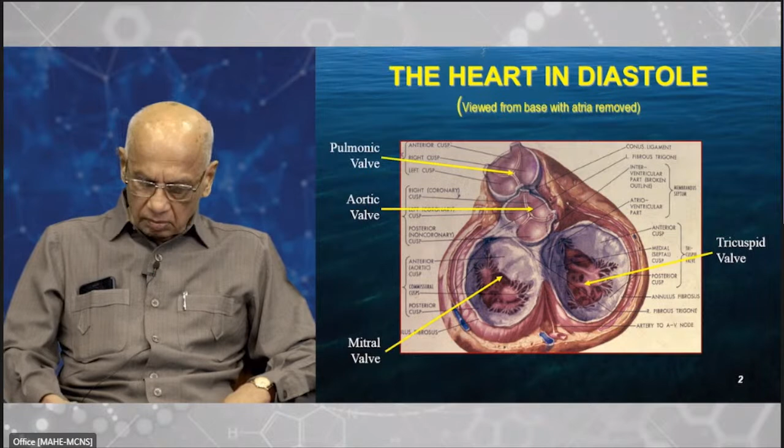So when we see patients with very severe symptoms, either these valves are not closing properly, so that there are leaks, or they are not opening properly, so that the output is blocked. That is where the problem comes.

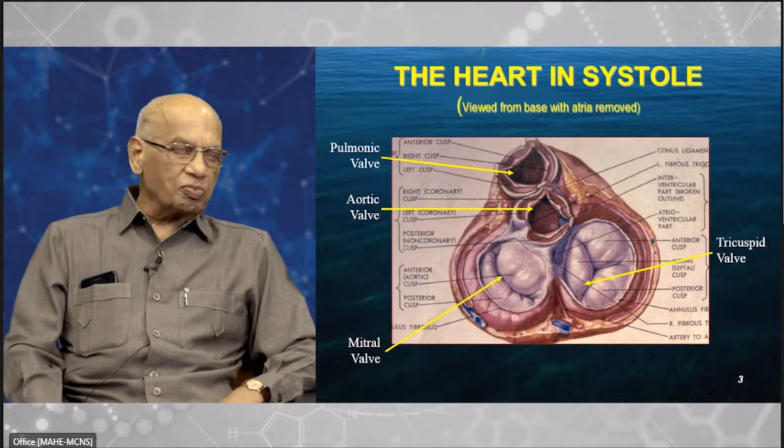Now, my problem was when I reached Trivandrum in 1974 in a new institute. We had plenty of patients with valvular heart disease. These are relatively young, in their late 20s or 30s, unlike in Western countries, where the average age is around 50. So we have young patients here, and a large number of women. This rheumatic heart disease is more common in women.

So when we started doing open heart surgery, I was trained to be a cardiac surgeon, so I knew how to do it. We had plenty of patients, but the problem was the valves. Valves had to be imported, very high cost, 8,000 rupees in those days, and our patients were poor patients. It's a government institute. The government wanted all this done free for them.

So we had very quickly a problem of a waiting list of patients. 100 patients, 200 patients in a matter of 2 years. Now it's impossible when you see these patients who are sick, they cannot breathe, and you tell them come after 2 years, your turn will come. It's the most heartless thing to do. We couldn't do that. So that is when we decided.

It was like I was trained to drive. I had a driving license. But I come here and I'm told you build the car. It is almost like that.

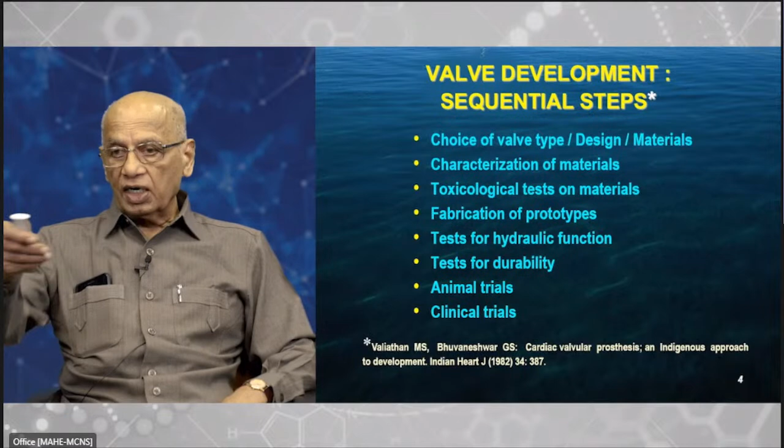Does it function the same way? That has to be checked. So we have to ensure that the rate can be increased. Flow can be, suppose, 1/3 ejection and 2/3 relaxation. Now can you change that a little bit and see whether the valve continues to function? All these kinds of testing we can do in the pulse duplicator. Now that is a very crucial test.

And then the next test is durability. As I mentioned earlier, the international standards which we follow, ISO, there is a particular number. All valve developers have to follow this. Otherwise, it's not acceptable. And that insists that it should have a durability of 10 years without any mechanical failure. Now that, as I said, is 367 million cycles of testing.

And obviously you cannot do the test for 10 years. So we have to do acceleration. The 10 years are compressed into 1 year. So 70 per minute, we accelerate to 700 per minute. That is how it is done. So an accelerated tester we have to develop; it is not commercially available. So again, if there is a problem in the wear testing and that model fails, then we have to start again.

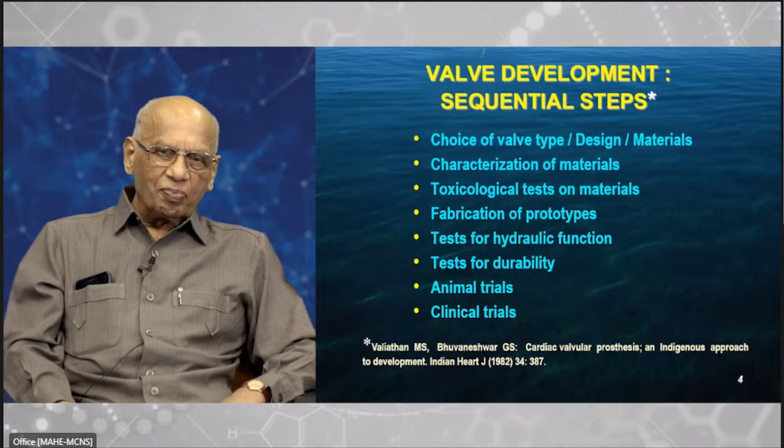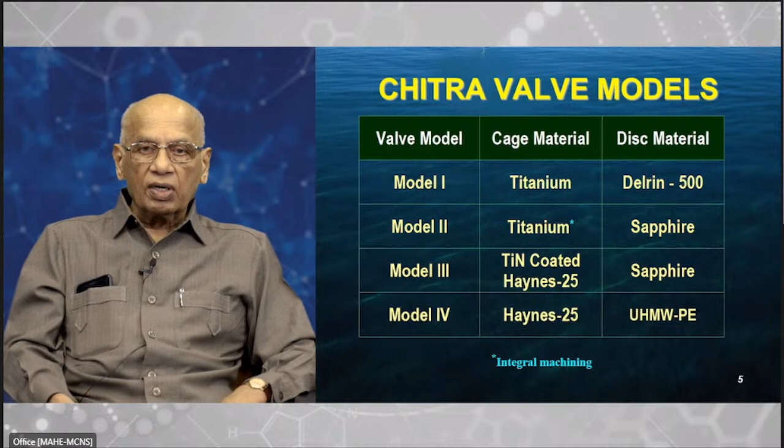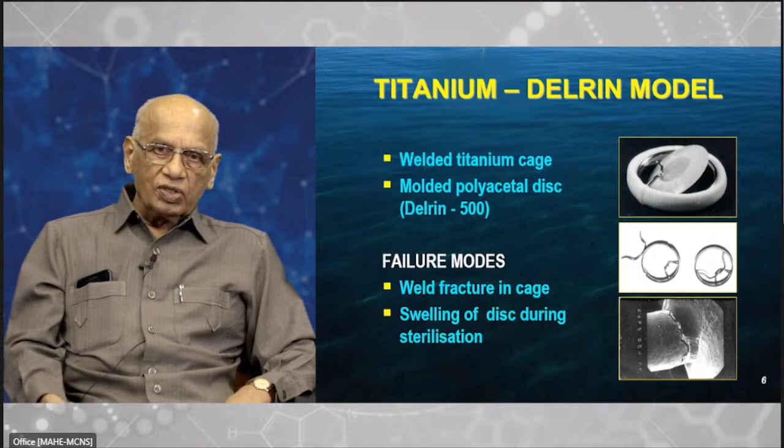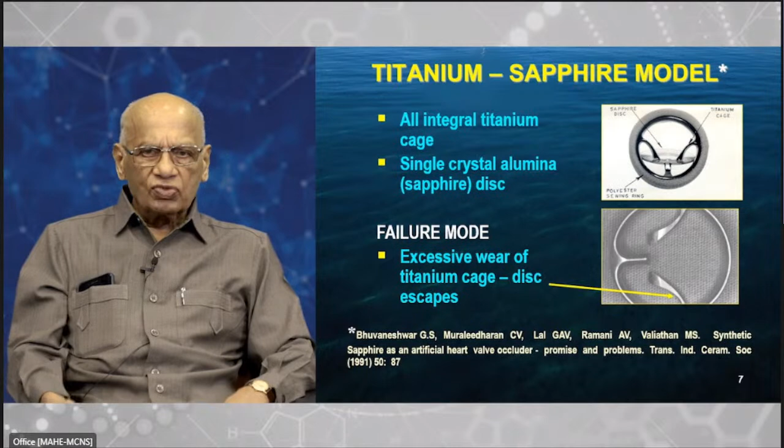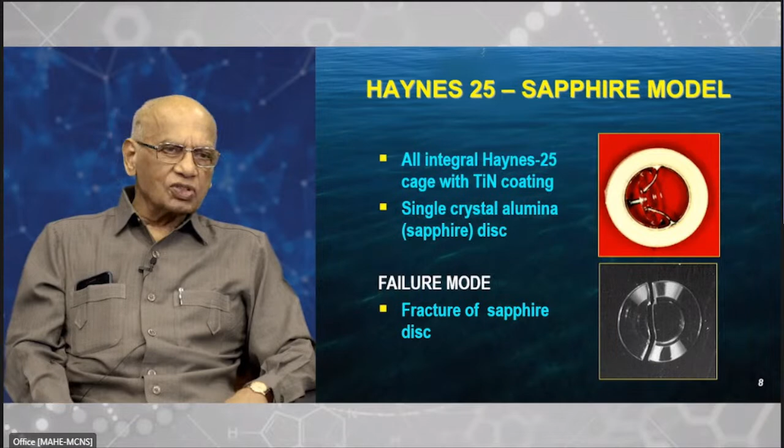Now this failed because the sapphire cracked. You can see that. You can see the sapphire is cracked. So the cage is all right here, but sapphire has cracked. So this also was a failure. Then we moved to the next.

That is the current model, the 4th model. Now here the sewing ring remains the same. It's a polyester cloth, warp knitted. There is no change in that. And we have the HAYNES 25 alloy for the housing cage of the valve with no titanium nitride coating. There was no need for it.

And the disc is ultra-high molecular weight polyethylene. Now this has not been used in cardiovascular applications, but there is a report of it being used in orthopedics, that we knew. And developing this, each setback is something like 2 years. We had already spent almost 6 years when that sapphire disc cracked, 1988. We had already been spending almost 7 years, I think, by that time.

Many people were simply tired. They wanted to give up. Many others were severely critical, wasting money and effort. Indians cannot develop heart valves, that kind of attitude. So we had to work very hard, very fast. That led to some of this testing, for example. We had to make a valve prototype and then do the testing for wear, for example. But we learned the time was very short for us, so we could do sub-assembly testing.

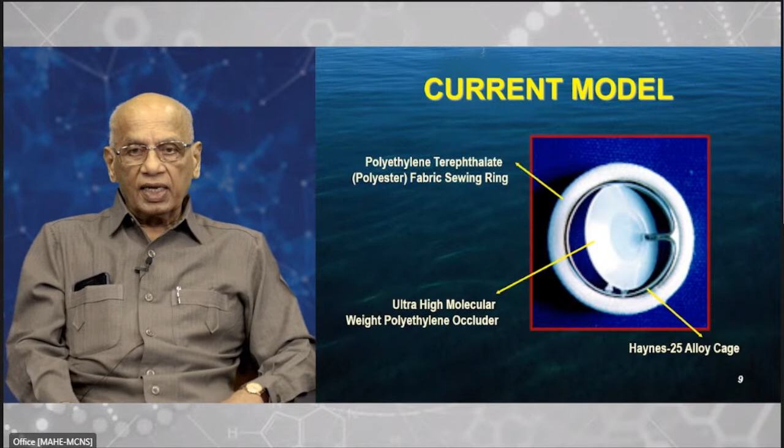In fabrication, this is the HAYNES 25. It's a very hard material. CNC machining, computer numerically controlled, from a solid metallic block. This was done for us by the Space Department in Bangalore. None of this could be done in Trivandrum. And the ultra-high molecular weight polyethylene, that was done by us. That's a powder, solid-state compaction in a die with isostatic compression. That was done by our group.

But one innovation there, the edge trimming using cryomachining, which is mentioned there, was done by our group. In fact, we had an engineer who was a fresh graduate from Calicut Engineering College who had joined. One of the problems we were facing at that time: when this disc is put in that 3-piece die and we take it out, at almost the equatorial region you will find small micro irregularities, almost like tiny hair-like projections, a few of them. Now that can produce clots. So we wanted to trim that.

Now it's a plastic, so you don't get a smooth surface when you trim it. We were not sure how to handle this. That was the time Murali joined, and he came up with a solution: you freeze it, cryomachining. If you freeze it, it becomes like a rock. Then you can do the machining and polishing. So that's the only one where we have a US patent. Otherwise, the valve itself you cannot patent, but this is patented. And the polyester sewing ring remains the same.

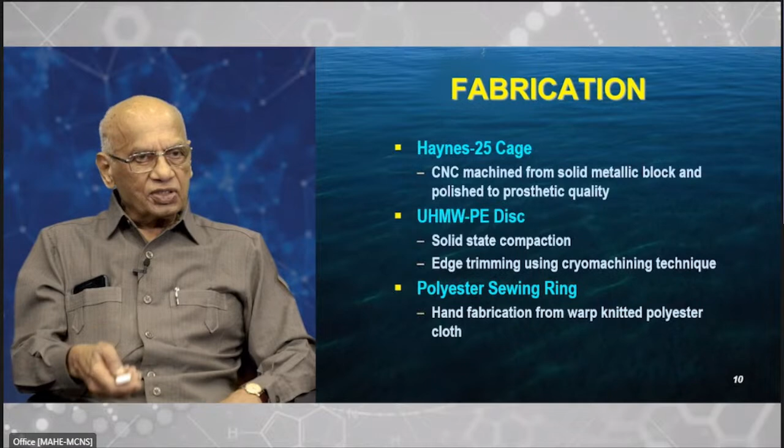Now, this is the fabrication of the current valve, which you have seen. And functional evaluation: the simulated testing, where a heart chamber is simulated, durability, and animal evaluation. We'll proceed with that. Now here is the pulse duplicator. On the left-hand side, you can't see the details, but essentially what we do is simulate the pumping chamber, the left ventricle of the heart. There is a rigid, transparent plastic case in which a balloon is suspended. At either end of this plastic chamber, we have 2 valves mounted. The circuit is completed, and it is primed with the water solution.

As this balloon inflates, the valve is pushed open and the fluid comes out through the outflow valve. When the balloon is deflated, that is the relaxation phase, the fluid comes into the chamber. So this is how it is done, and pressures are measured upstream and downstream, and flows can be photographed and recorded. The rate can be changed as we like. Suppose you increase it from 70 to 100, is the flow normal? Are the pressures remaining acceptable? All those can be measured.

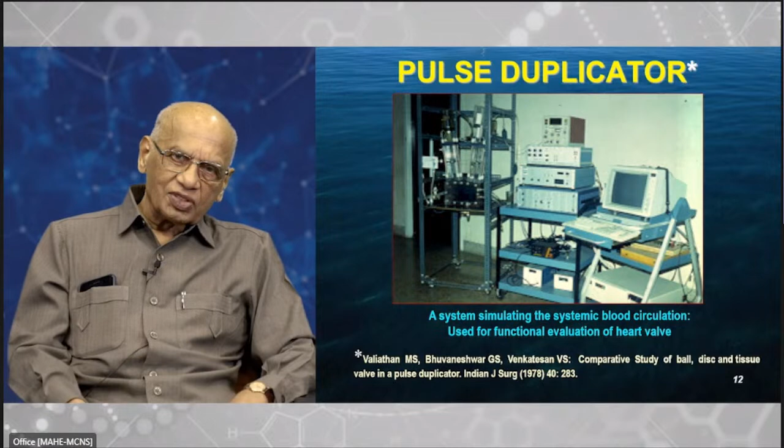Now here is a wear tester, and here again there is a rigid chamber in which 5 valves are mounted, and the rate is increased to 700 from 70, so that in 1 year we get the results of 10 years durability. At every 30 million cycles the disc is taken out, the weight is measured, the volume loss is calculated and all that. That is how the wear testing is done. We have published all these also.

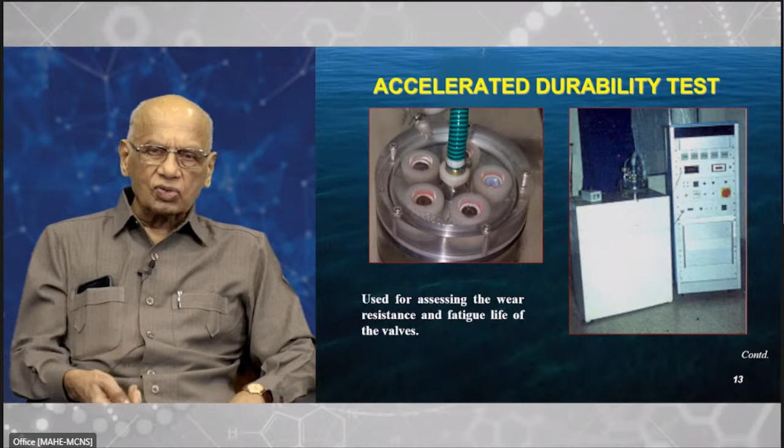Now the wear of the metals and plastic must be tested for 10 years, 36 million, which I mentioned. And the trick is to accelerate the testing. 70, we make it 10 times. And that is necessary to get the International Standards Organization approval. We have published all these in great detail.

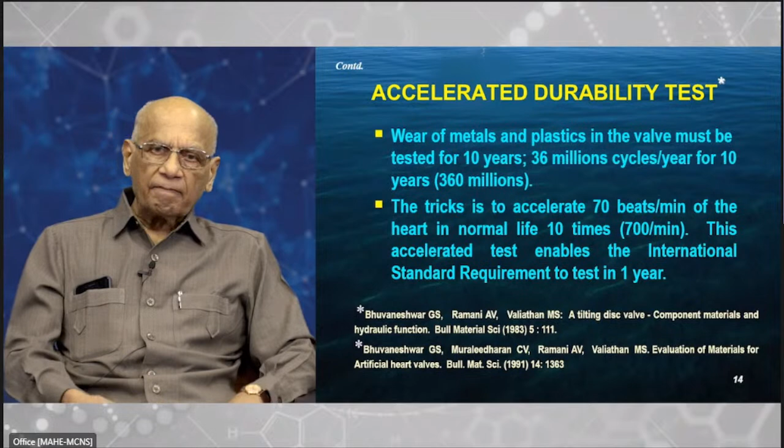And mitral valve was the one which is very frequently diseased in human beings. So that's the valve which we replaced. In 3 to 6 months, they have to survive in good health. Then only we are allowed to do autopsies and take out organs and do the testing. And we have to have a minimum of 3. We actually had done 5 animals. And this requires not only the surgeon but the anesthetist. We had to have very skilled people to give anesthesia to the sheep during operation.

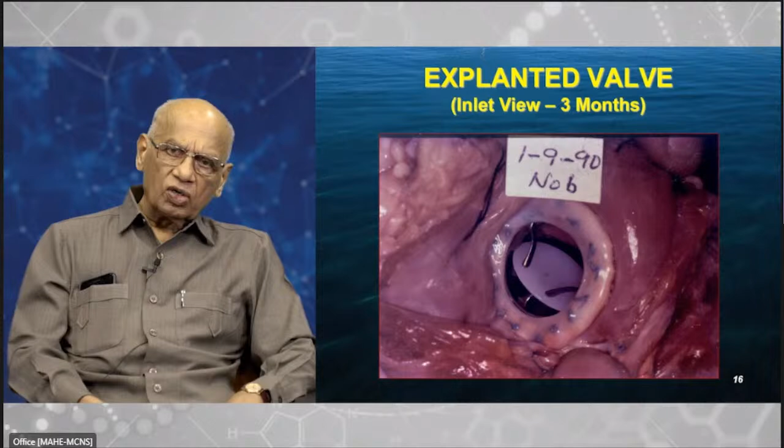Now this was a preclinical evaluation, but we have come to a stage of clinical evaluation. So we need to have the ethics committee approval. And ethics committee, as you know, is an essential requirement. In those days, it was not very common in India, because there were very few implant development activities. Now there are well established institutional ethics committees. They simply didn't exist at that time. We were one of the pioneers in that.

In fact, when we approached the Kerala High Court Chief Justice at that time, Justice Poti, I didn't know what the legal position was. He didn't know either. He said, I don't know about this. I knew the international situation, how ethics committees evolved, a very big issue abroad. So I had all the literature, and then he asked me to discuss it with Justice Sukumaran, who was interested in social issues. So I had a long discussion with him. He was so much interested, he said, I'll be your chairman. So he was the chairman of our ethics committee.

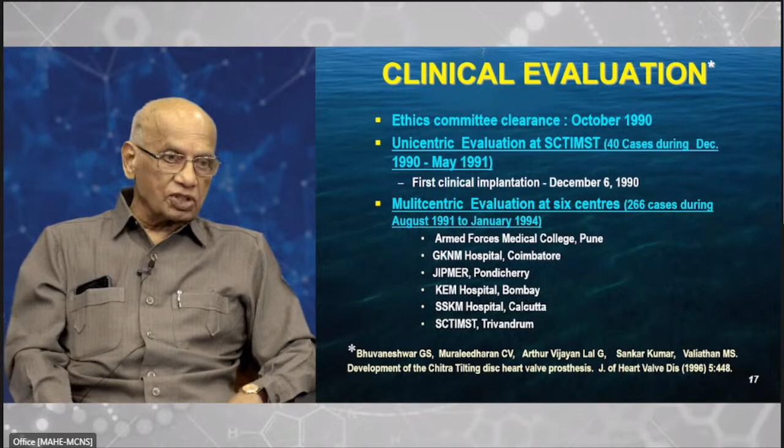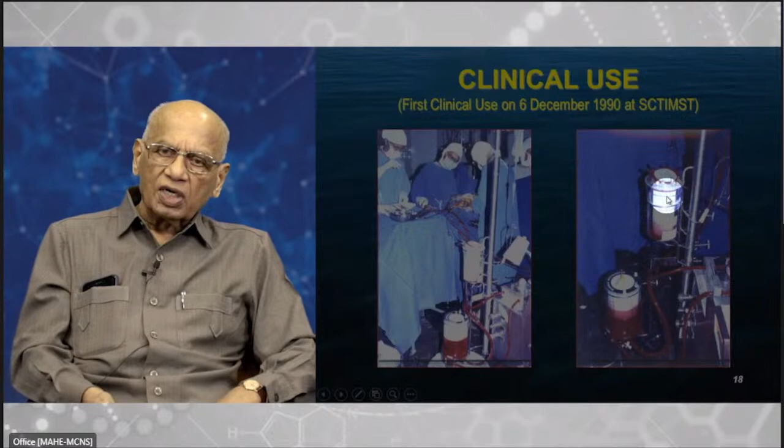So during that time, these functions are taken over by these 2 devices. And now they are magnified in this picture. You can see this is the cardiotomy reservoir; blood sucked out from the heart comes into that. And this bottom one is the oxygenator, which does the function of the lung. Now these 2 devices were also developed by our Chitra Institute. So this particular operation is unique: not only the heart valve, but also these accessories, the oxygenator and cardiotomy reservoir, were also developed by our group.

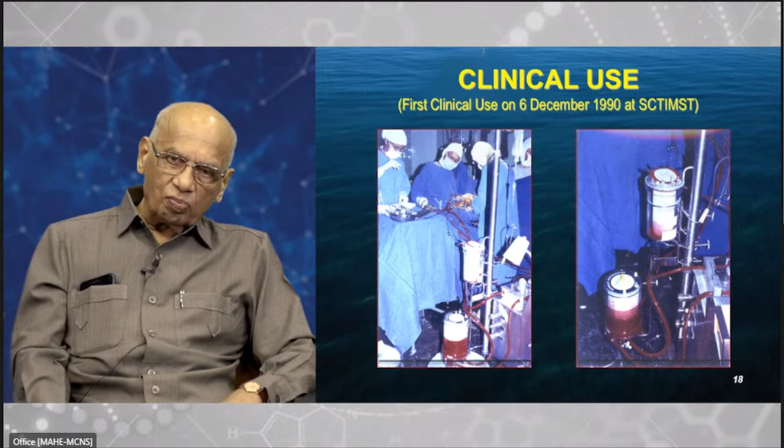Now, I have mentioned here and there Chitra Institute alone; that was the lead institute, but they alone could not develop this, obviously. So when we had a strut failure in the early days, we had to go to NAL Bangalore. And they were the people who told us why the fracture happened, how that could be prevented. That's crucial information. We depended on NAL Bangalore.

Then it came to the polyester fabric. Polyester is well known. Even clothes are made of polyester. So we approached Coimbatore Textile Research Institute, SITRA. They knew everything about polyester, knitting, different types of knitting, warp knitting. They knew all that. But they had never heard of it being used in heart surgery. They were curious, surprised, and very happy that they could be helpful.

And they made that sewing ring for us, because that has to be fitted into the valve, very much like a tire is fitted on the wheel of a car. That's how it is fixed. And they did a first-rate job. Through all these models 1 to 4, we had to change almost everything else, but the sewing ring never had to change. That was done by SITRA for us.

And then came the computerized numerically controlled CNC machine and this EDM, electric discharge machining. That is integral cage construction. That was done by HAL Bangalore for us. They had done the electron beam welding, which failed. So this CNC and EDM, they were done by HAL for us.

Now I'm just showing, when you have a valve implanted, the international standards again require certain types of follow-up. You must indicate the late mortality. Is there any clot formation, thrombosis? Are there any bits of clot being released, embolism, hurting the patient? Any infection? All these must be reported. There are a few more. Otherwise it is incomplete.

So we have taken the 2: CHV is our valve, and what is shown here, Antunes, is a similar valve, the Medtronic Hall valve, very similar to our valve, tilting disc. If you want to compare post-operative follow-up, you have to compare with a similar valve and a similar population. If you take an American series, for example, the average age of the patient is 50 years. So that is not comparable. Or the valve model may be different. So here we have South Africa; Antunes was operating in South Africa. Patients are similar, and the valve is also similar.

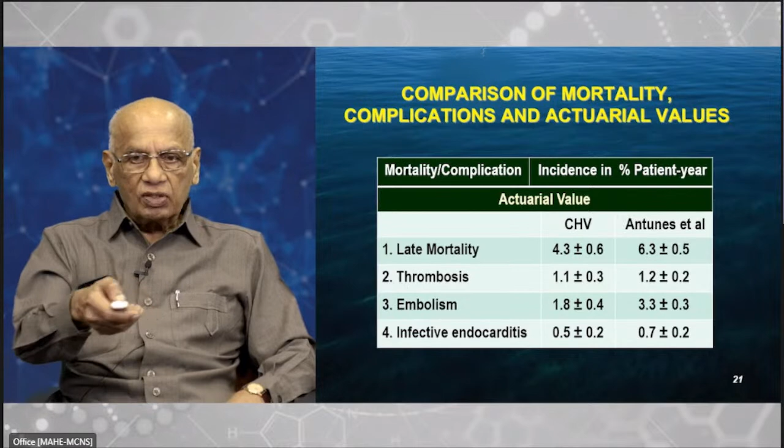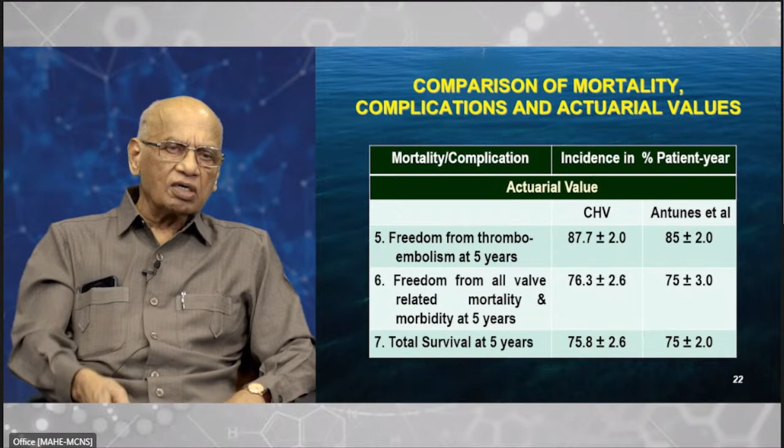And you will find in all these parameters that we have measured, ours is slightly better. Freedom from thromboembolism at the end of 5 years. Freedom from all valve-related mortality, like 76, 75. These are total survival at 5 years. That is a projection actually. But in all these, the Chitra valve has done very well compared to the international model.

Now this technology was transferred in 1995 to TTK, and more than 1.5 lakhs... now it has reached 1.6 lakhs implanted till date. And about 230 centers in India are using this valve, and it is exported to developing countries. That is the current status. And the National Technology Award was given jointly to our institute and TTK Healthcare.

Now the update: in 2022, the first patient who received the Chitra valve is alive and well. He was a teacher at that time. Now he lives in Thrissur, and 1.6 lakhs have been implanted. There is no case of mechanical failure reported in any of these valves so far.

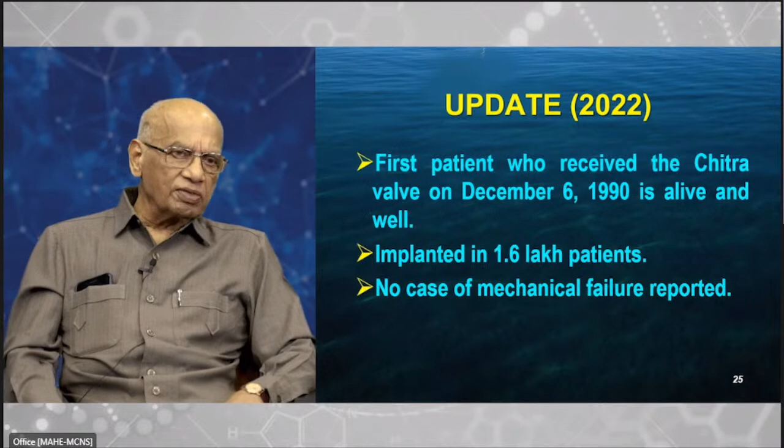Now this is a picture of the team. From the left, one is Krishna Manohara, who was my student, who assisted me. He's a very prominent cardiac surgeon now in Haryana. He's a specialist in pediatric cardiac surgery. He's standing there. Then it is me, and next is our patient, Muralidharan, who on the 6th of December 1990 received the valve, and is still alive, is active.

So he is there. And the next is Bhuvaneshwar, the engineer who was my student in IIT, later on came and joined. Now he's retired. He's a first-rate engineer. Next is Janet, our theater nurse. Next is Rathod, who was our anesthetist. And Thomas, who ran the heart-lung machine for us. So that is the group in this.

Now there are certain things I would like to stress here. One is, as I mentioned already, networking is extremely important. Without that, if we insisted that we had to have all these facilities made available to us in Trivandrum, nothing could be done. We cannot have all these facilities, but all these are available. We approach, and there is a lot of goodwill.